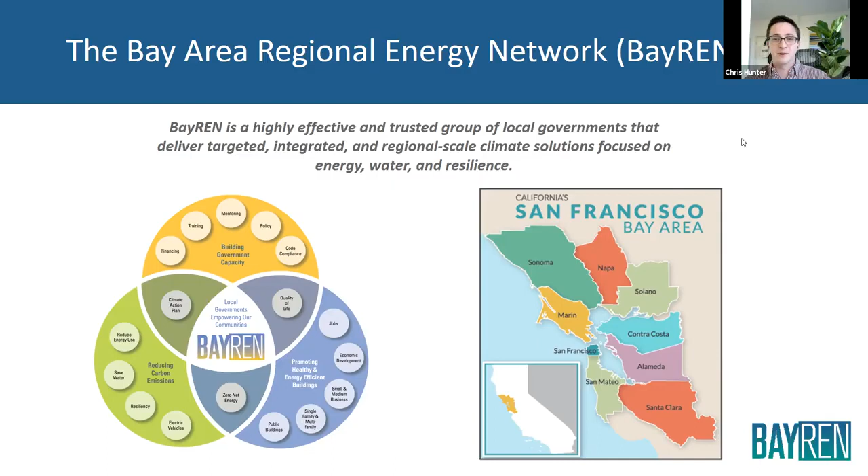So we have a pretty packed agenda today. We'll be covering first some context into what's happening in the energy sector, what are some of the big changes that set the context for why we're even talking about electrification. Then we'll hear from Noah with East Bay Community Energy about your new electricity provider and how you can upgrade to 100% renewable electricity. Then we'll walk through what does an electric home look like, what are the key appliances, what are the key considerations to make. Then we will hear from one of our contractors, Larry Waters, and a homeowner in Berkeley who did a full home electrification. Finally, I'll cover quickly how to get started, what rebates we offer, and hopefully we'll have some time for Q&A.

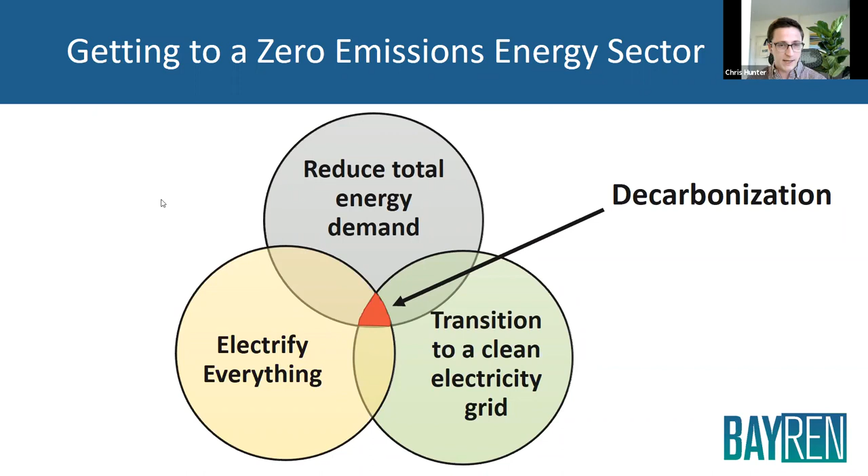I just want to run through a little bit of some of the other pieces, some of the groundwork here. As I'm sure a lot of you know, California has some of the most ambitious climate goals in the world. We have a goal of having our electricity production at 50% renewables by 2025 and 100% zero carbon by 2045.

And we've made really great progress toward that. I actually think we are well ahead of track on that 2025 goal. In the entire US in 2019, for the very first time, renewables surpassed coal in terms of total consumption across the country. You can also see that the cost of solar and wind has really plummeted, to the point where in most cases solar and wind are the cheapest form of electricity you can build.

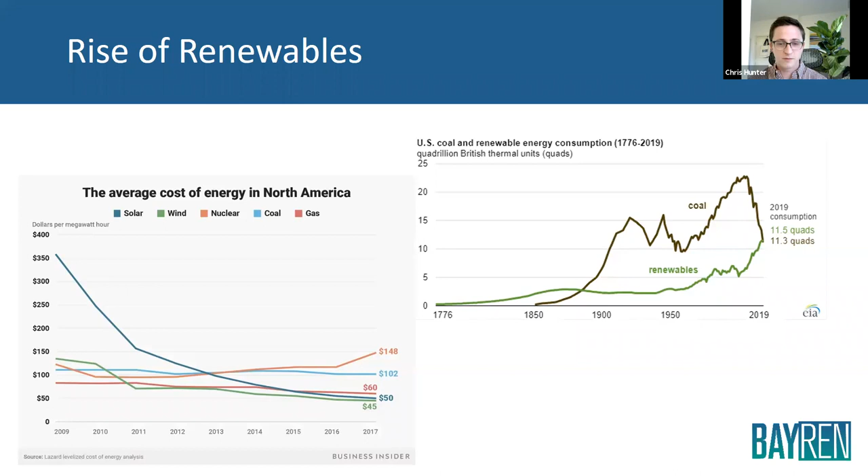So we're really at a turning point here where the grid is getting cleaner. There's been a lot of gains in technologies and in what clean appliances are available. So we're really at an inflection point for moving to an all-electric, decarbonized economy.

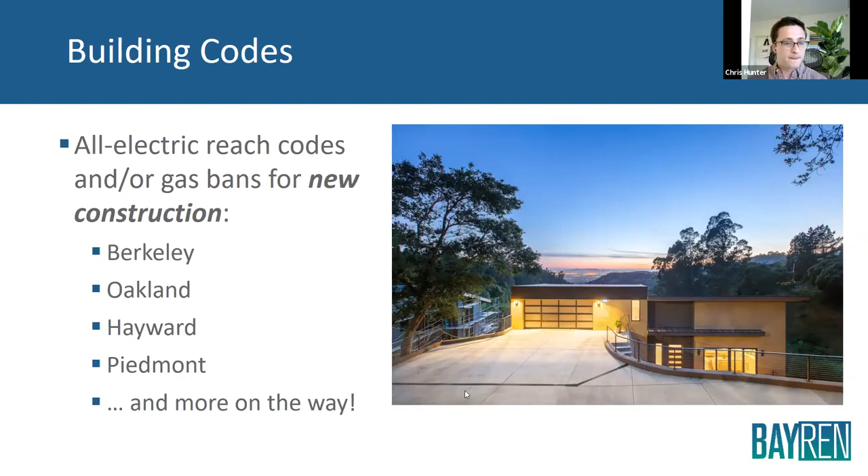You can see that also on the local level, a number of cities in Alameda County have passed all-electric reach codes and gas bans. So for new construction, no one's going to come in and shut off your gas right away, but for new construction they're mandating that those new buildings going up must be all electric. Again, this isn't happening for existing construction quite yet, but cities are starting to think about ways to start encouraging existing buildings to go all electric as well. That's just kind of the direction things are heading in overall.

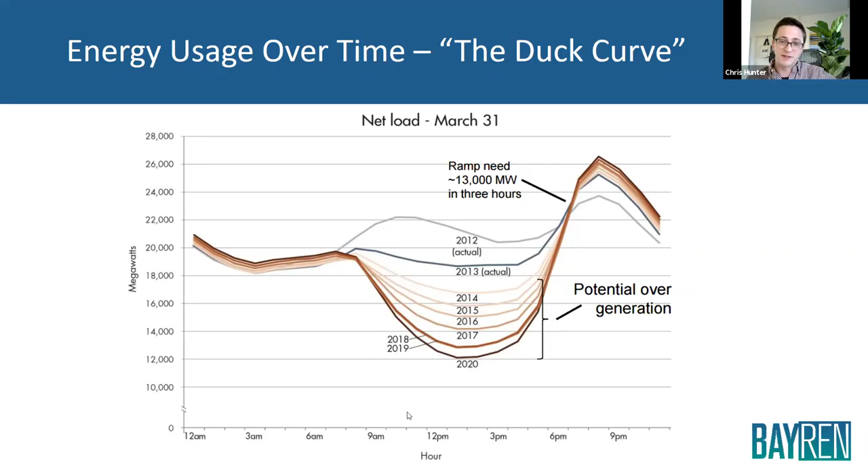There's a lot of programs right now trying to incentivize demand response—doing more of your heavy electricity activities during the middle of the day when the grid is at its cleanest. And finally, as we've seen the last couple of years, there's really a need for resilience. It's not enough to simply reduce our level of emissions, but we need to do it in a way that's building resilience, making sure we can withstand wildfires, extreme heat, and earthquakes.

We've seen, the last couple of years, public safety power shutoff events where PG&E will preemptively shut off power in order to prevent wildfires. We've all experienced the poor air quality for a couple of weeks every fall now due to heavy wildfires. A lot more people are starting to think about installing air conditioning and cooling capacity due to more and more extreme heat days. And of course, there's always the threat in California of a major earthquake.

A lot of people are afraid that if they switch to electricity, they'll be more prone to blackouts and power outages. That's not necessarily the case. There's actually been models and studies done that have shown if a major earthquake were to hit the Bay Area, electricity would probably come back within a couple of days, at most a week, whereas gas could potentially be out for several weeks, up to several months.

So really we want to start thinking about how can we build homes that are resilient, and communities that are resilient, and can keep going despite these disasters.

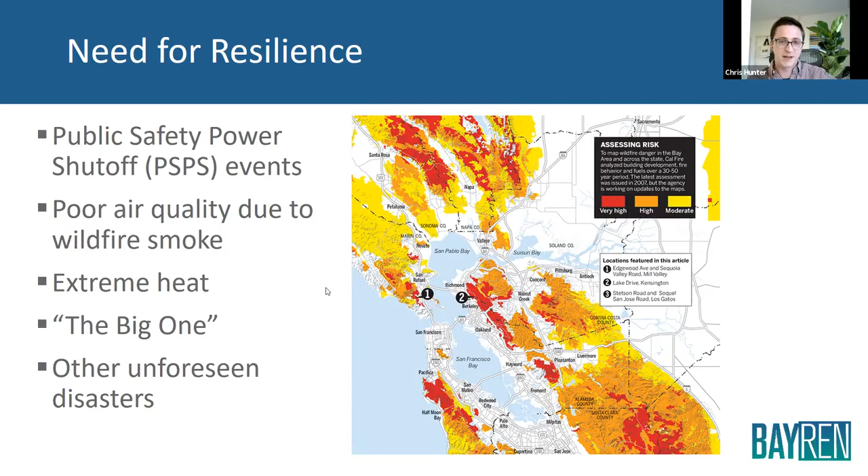But what does this mean? In the short term, taking all this into account, PG&E is going to transition everyone in Alameda County to time of use rates within the next couple of months—I think June is the date. What that means is they'll actually charge more for power during those peak hours of 6 to 9 p.m. when the grid is dirtiest, and electricity will be cheaper during the middle of the day. So that will be happening pretty soon.

I'm sure you've gotten some letters from PG&E explaining that process. A little bit longer term, we expect that as more and more people get off gas, the price of that gas is actually going to go up, because most of the cost is from infrastructure—maintaining the pipes and things like that. It's a fixed cost. So as people get off gas, it's going to be the same amount of costs paid for by fewer and fewer people. So I want to start thinking too about, even though electricity is a little bit more expensive right now, that might not always be the case.

And then finally, we're just going to see a lot more demand for solar panels and battery storage. Noah will talk a little bit about that and what EBCE is doing to address that. We'll also see probably a much bigger focus on indoor air quality, and I'll address how electrification can help during those heavy smoke days of keeping the air inside your house clean as well.

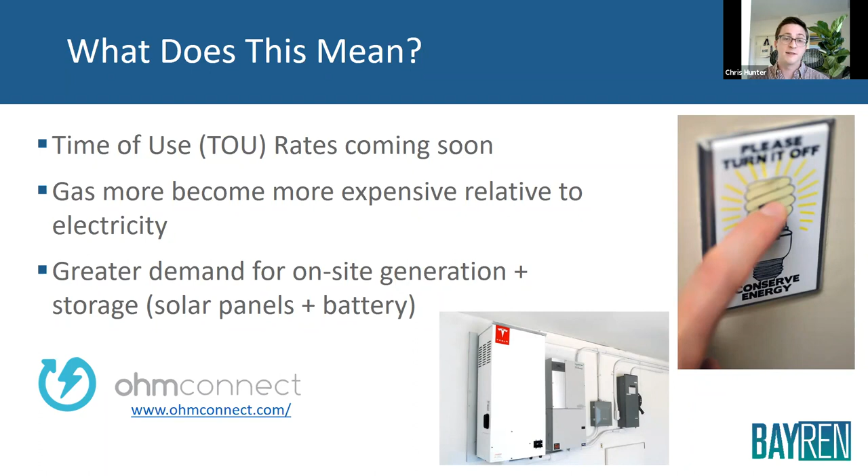So with that, Noah, why don't you take it away?

Hello everyone. I'm just going to give a brief overview of who East Bay Community Energy is, what we do, and what we offer. East Bay Community Energy is essentially a not-for-profit energy provider for all of Alameda County, minus the city of Alameda, and also the city of Tracy in San Joaquin County. Essentially what we do is, because we are the electricity provider, we have revenue from that, and we reinvest earnings through the sale of energy back into the community through local green energy, local jobs, local energy development, and local programs as well. You can jump to the next slide.

Essentially how it works is EBCE handles the purchasing—essentially the procurement and development of new clean power plants for EBCE customers—and sells that directly to customers. PG&E, as always, handles the delivery of that, and then you get all the benefits of having cleaner, lower priced or cost comparable electricity.

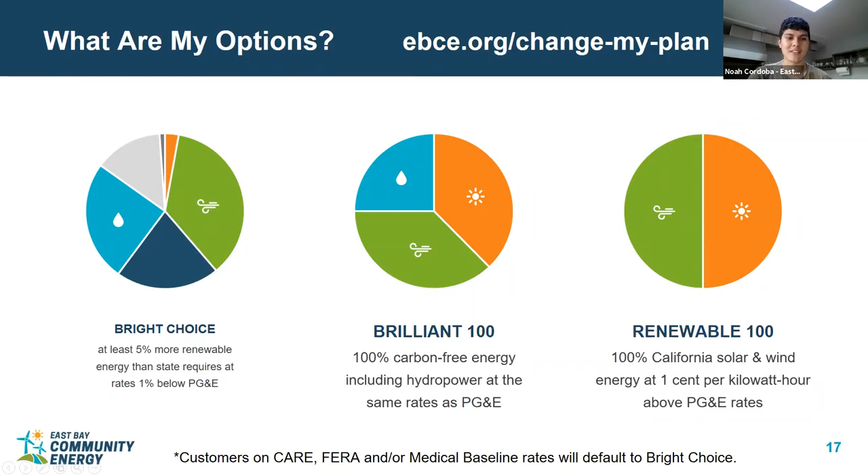One thing I'll note is that if you're not sure whether you're an EBCE customer, you can look at your PG&E bill, because all billing happens directly through PG&E. You'll see PG&E electricity delivery charges, and a line item for East Bay Community Energy delivery charges. That's important for understanding what product you're receiving from EBCE, because when your community decided to become part of East Bay Community Energy, if you stayed with us, you were defaulted onto one of our products. If you're not sure, check your bill, and if you're not on Renewable 100, that's a great opportunity to opt up if you're interested.

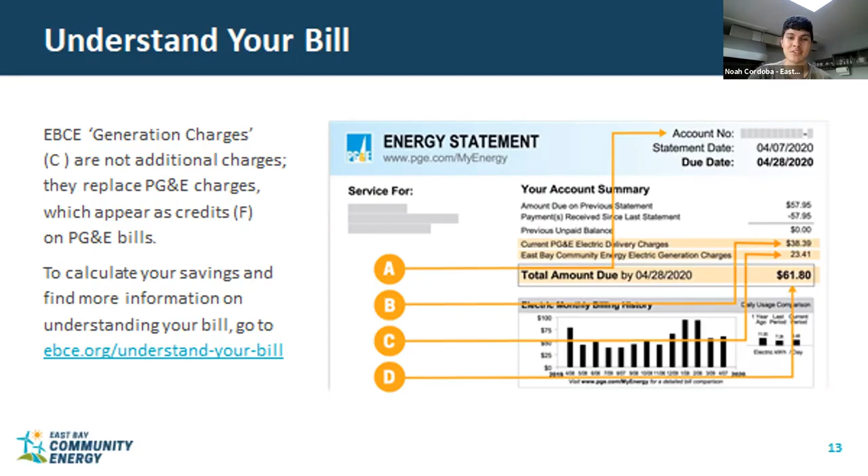I want to plug one of our programs because it's relevant to information you'll receive today about home electrification, specifically generation at the house level. That's our Resilient Home Plus program. This program is designed to help residents access and install residential solar and battery backups on their homes. You're able to visit ebce.org/resilienthome to get more information. We work with a vetted solar installer to access preferred pricing for our customers.

We also have a route for customers to receive a $1,250 incentive to share power with EBCE when there is high demand during that 4 to 9 period. When solar comes offline but you have battery storage, you can achieve a lot of cost savings for yourself, and EBCE will also incentivize you if you're up for that.

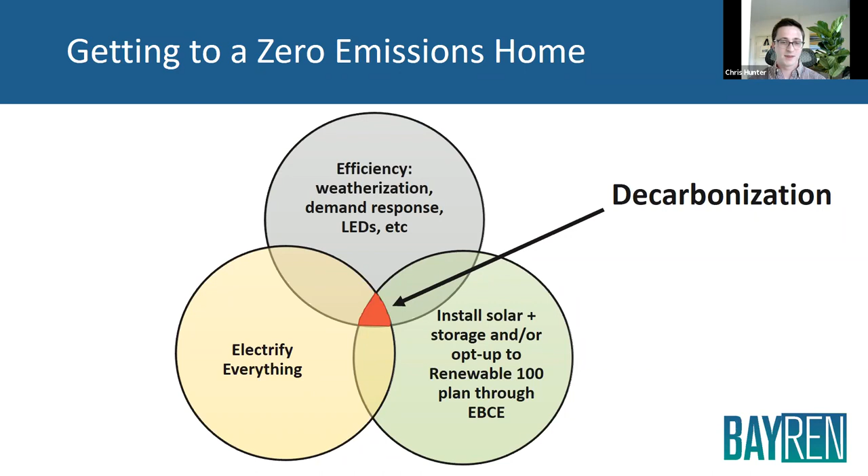And finally, that third step, once all your electricity is clean, would be to shift away from gas furnaces and water heaters into electric appliances.

So mostly we talked about the climate impacts. I know that might not be the most motivating thing to everyone—it's pretty far out there, maybe not everyone cares. But we want to stress that there's a lot of non-climate benefits to this as well, beyond just reducing your emissions, and that's actually probably the bigger draw here.

The biggest one that we always stress is health. There's a lot of really dangerous byproducts from the combustion of natural gas, particularly in your kitchen where you're standing right above it and breathing it in. You can get carbon monoxide, and nitrogen dioxide is a really common one that can cause asthma. Studies have found that children who grew up in homes with gas stoves are 24 to 42% more likely to develop asthma. So if you have kids in your home and you're thinking about making that switch, a stove is probably the most important one to do first in terms of health, even if it might not have the biggest impact in terms of lowering your emissions.

And then there's a number of other benefits. The biggest one in safety is just that there's no risk of a leak or an explosion. I grew up in San Mateo County, and I remember clearly the San Bruno explosion when I was a kid. That was really scary, and it could happen again, so we want to reduce that risk as much as possible.

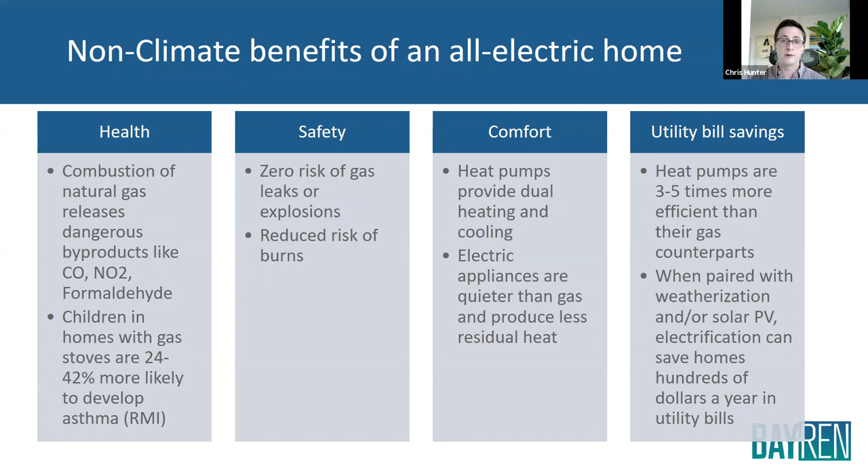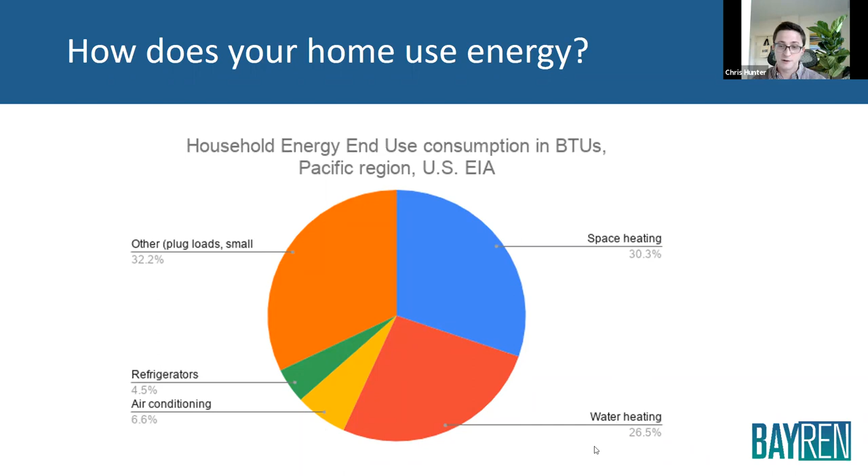I already talked about this, but I really can't stress enough how important efficiency is before you electrify, for a couple of reasons. One, it's easier to do at any time—if your water heater and furnace are under 10 years old, it might not be time to replace those yet. In the meantime, you can make sure your attic and walls are well insulated, do air sealing, and make sure your ducts are sealed and insulated. These will save you a lot of energy and lower your utility bill quite a bit while you're waiting to make bigger changes to your appliances.

And BayREN does offer rebates for all of these. We'll go over that at the end of the presentation.

You can get up to $1,000 each for attic insulation and wall insulation, and then smaller rebates for air sealing and duct repair and replacement. So it's really important to do these first.

The other reason is you want to make sure when you replace your furnace that you're sizing it correctly. If you just replace your furnace with a heat pump without doing these efficiency measures first, odds are you'll get a system that's way too big, which means it'll cost too much upfront, use more energy than it needs to, and not save you as much money. It also might not have much impact on comfort if your home is really drafty and losing a lot of that warm air your heat pump is producing.

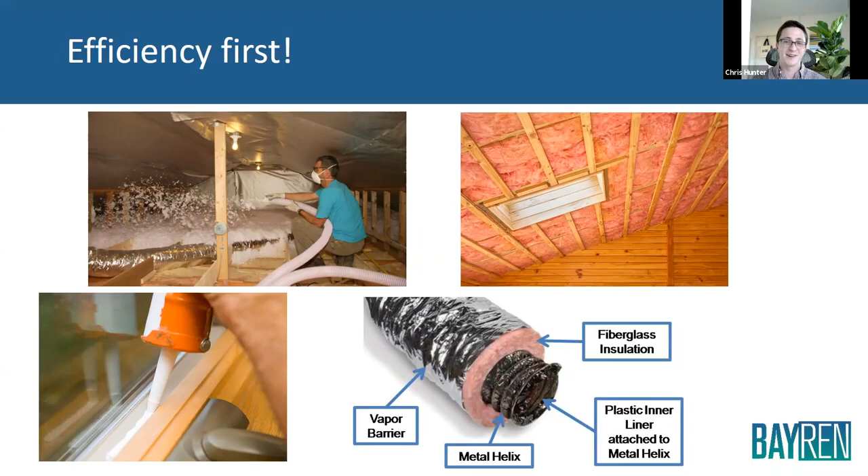So it's really important to think about efficiency before electrification, or together, but we always want to stress that. Now into the actual fun stuff.

If you look into anything related to electrification, you're going to see the word heat pump quite a bit. It's going to pop up all the time. A heat pump isn't one specific appliance, it's rather a technology used in a number of really highly efficient appliances. Normally if we were in person, I'd ask you to raise your hands if you already have a heat pump in your house, but you should all have your hands raised, because if you have a refrigerator, you have a heat pump.

Your refrigerator works like this: it's a box with a fan that blows air out of the box, and has lines of refrigerant that absorb the heat from that air and cool the refrigerator down. A heat pump water heater works very similarly. You have a fan at the top that blows air in, compresses that, then it has a tube filled with refrigerant fluid that absorbs all the heat from the air and puts it into the water, and cool air comes out the other side.

There's a couple of benefits to this. The main one is that they're 300 to 400% efficient, which sounds impossible. The reason is that a gas or electric resistance water heater burns gas or creates friction to generate heat and put that into the water. A heat pump doesn't generate heat, it simply moves heat from one place to another. So for every 1 unit of electricity the heat pump water heater uses, it can put 3 to 4 units of heat into the water, compared to gas, which for every 1 unit it burns can only put about 0.8 to 0.9 units into the water. So they're much more efficient and can save you money that way.

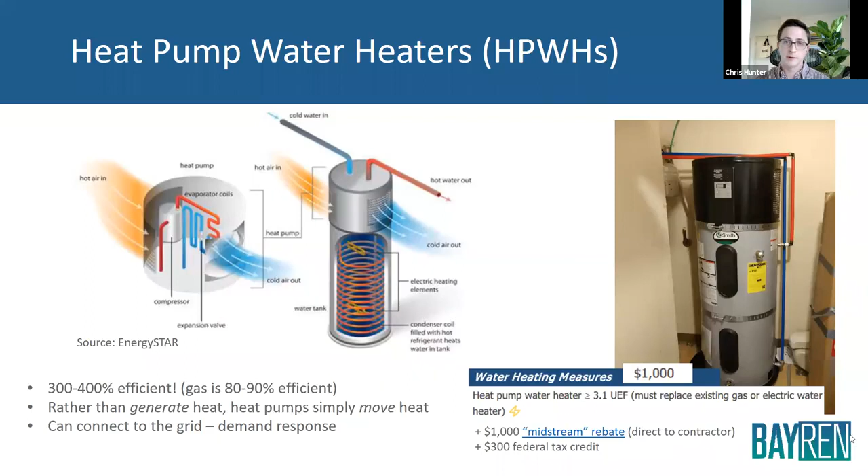The same heat pump technology also works for heating and cooling. The only difference is the condenser unit goes outside, and looks a little bit like an air conditioning unit. Then there's a separate air handler inside, connected with refrigerant lines. Again, in addition to being super efficient, 300 to 400% efficient, these also provide the benefit of being able to switch directions, so you can provide heating or cooling. If you're someone who doesn't currently have AC and you're considering adding it, this could be a really great solution to avoid the cost of upgrading two appliances at once.

And they also have some flexibility. So if you have a house with a current central furnace with a duct system, you can just replace the furnace with the air handler right where it is, and then add that heat pump outside, and you're good to go. It'll work just like your furnace now, except it'll also provide cooling.

The other option is you'd have that heat pump outside and then multiple lines of refrigerant running to different parts of the house, and each room could have its own air handler. So if mom and dad like the room a little bit cooler, they can set it cooler, and the kids can set the room warmer, and you're still being really efficient and not doubling down on how much energy you're using.

We do have $1,000 in rebates available for these as well. There are some limitations with the central systems, so make sure to look into that or ask your contractor before going through with that and make sure that you are eligible. Again, it's a $1,000 rebate plus a $300 federal tax credit.

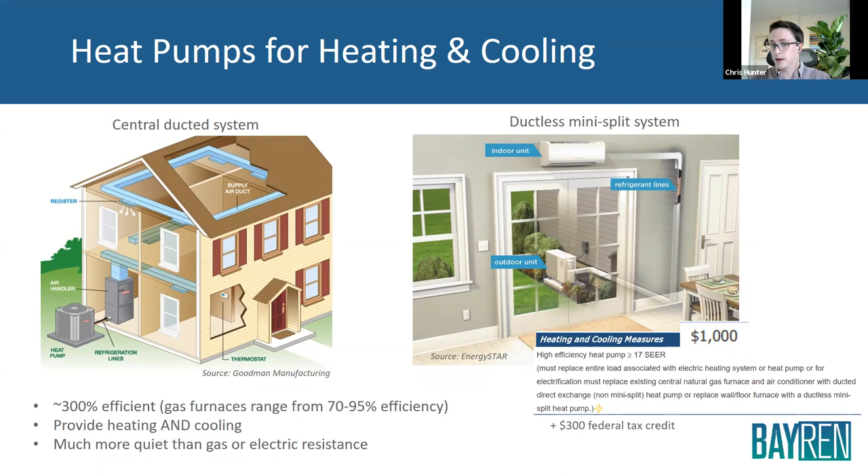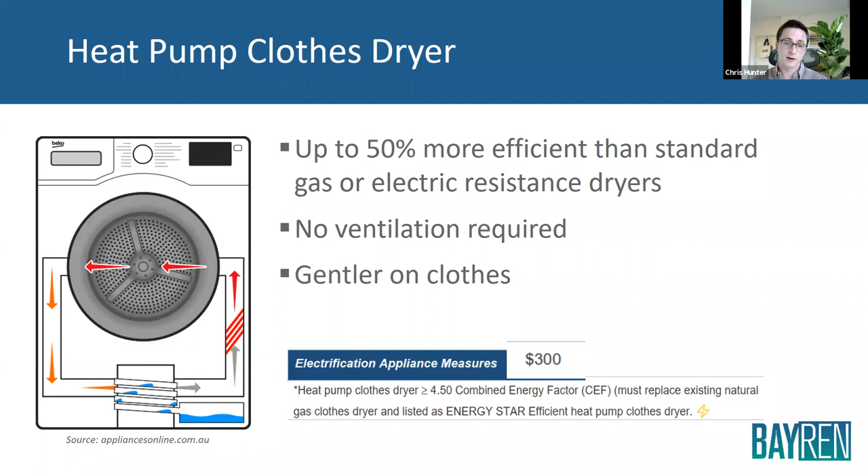The other big appliance that heat pumps are used in is clothes dryers. I'm not going to spend too much time on this, but again, they're highly efficient, 50% more efficient than a standard dryer. The other big benefit is they don't need ventilation, so they're really easy to install and pretty low maintenance, and they're also really gentle on clothes. A lot of these are a little bit more upfront than a normal gas dryer, but we do offer a $300 rebate for these, which brings them mostly in line.

And then this is a big one that always gets a lot of questions, is induction cooktops. A lot of people, their first reaction when they hear about electric cooking is these old coil systems that get really hot. I actually have one of those in my apartment. I hate it, they're terrible. But induction is not that. That's the important thing to remember.

Induction works not like a heat pump, but using electromagnetics. Rather than creating heat like a gas stove, they use an electric magnet to activate the electrons directly in the pan, and the pan itself turns into the vehicle of heat. The pan is what's getting hot, not the stove itself. So again, they're very efficient and can save you money in the long run.

I think the biggest factor here is indoor air quality. They do not release any byproducts, so you're not breathing in any of that nitrogen dioxide that can cause asthma. They're much better for indoor air quality, and they're a lot safer—it's hard to burn yourself quite as easily. And people just like cooking on them.

We actually have an event coming up tomorrow evening, I'll send out the info, where we're going to have a professional chef who cooks on induction and talks all about why she loves induction so much. They're really fast and really powerful to cook on, so a lot of people really enjoy them. It's a little bit of a learning curve, but it's not too bad.

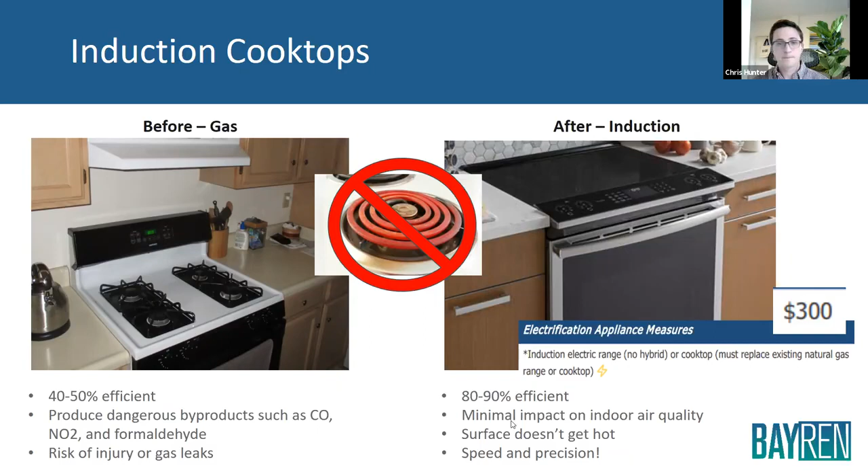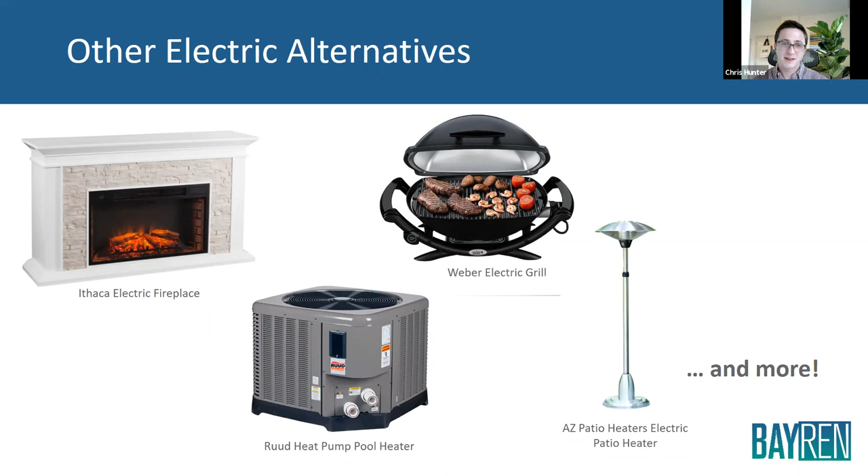I'm not going to talk too much about these since we don't offer any rebates or resources for them, but just know that almost any appliance or system in your home that burns either gas or propane, there is an electric alternative for that. There are models out there on the market now for electric fireplaces, heat pump pool heaters, electric grills, electric patio heaters—almost anything you can think of. There's an electric alternative that probably works just as well as the fossil fuel powered one you might be used to. So if you are doing a remodel or redoing your patio, something to think about and look into the options.

And then the last thing I want to touch on here, not super fun, is electric panel upgrades. If you're switching all of your appliances from gas to electric, that's going to add a lot of load onto your electric panel that has to process. You really want to make sure you have the capacity to accommodate all those new electric appliances. Most homes in the region have anywhere from 100 to 200 amp panels.

Usually newer houses and larger houses will have the 200 amp or larger panels. A lot of the older, smaller homes in places like Berkeley and Oakland might only have 100 amp panels. If you have 200 amps, you should be okay. I would still consult your contractor, do some research, but in most cases, 200 amps is enough to accommodate a fully electric home. 100 to 150 amps, it's a little bit trickier.

It is possible. This table on the right is an example of a 2,000 square foot home with a 100 amp panel that was able to go all electric without doing a panel upgrade. But they had to get a little bit creative.

So before you call the contractor, maybe take a look at your panel, see what size it is, and if it's 100 or 150, bring that up, get their advice, and make sure to do some research before you install a heat pump water heater that could put you over that limit. I'm hoping the contractors on the line can answer any more specific questions about that.

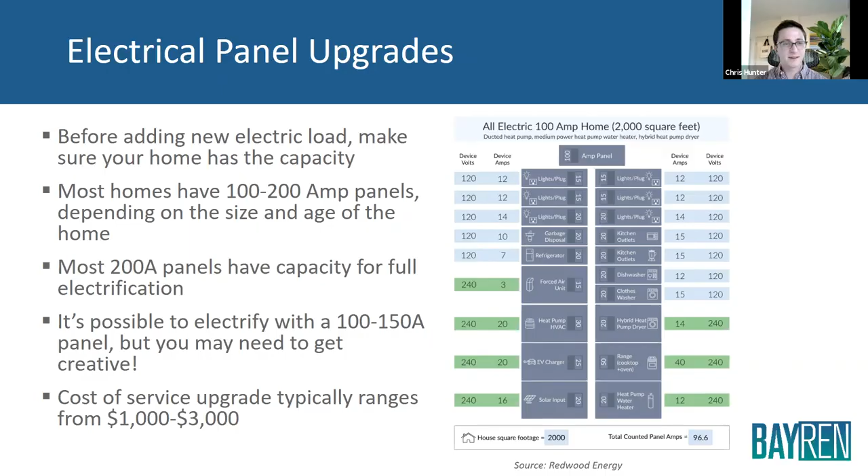So with that, Larry, if you are able to turn on your video. Larry is with Electrify My Home. They're a BayREN participating contractor. He does some really great work around home electrification. He's going to talk about a case study in Berkeley, and we actually have Rebecca, the homeowner, who's also on the line and can answer some questions. So take it away. She is in El Cerrito, and she works for the City of Berkeley.

My name is Larry Waters, and I am the owner and founder of Electrify My Home, the first of its kind, only electrification business. If you have questions about gas, don't call me.

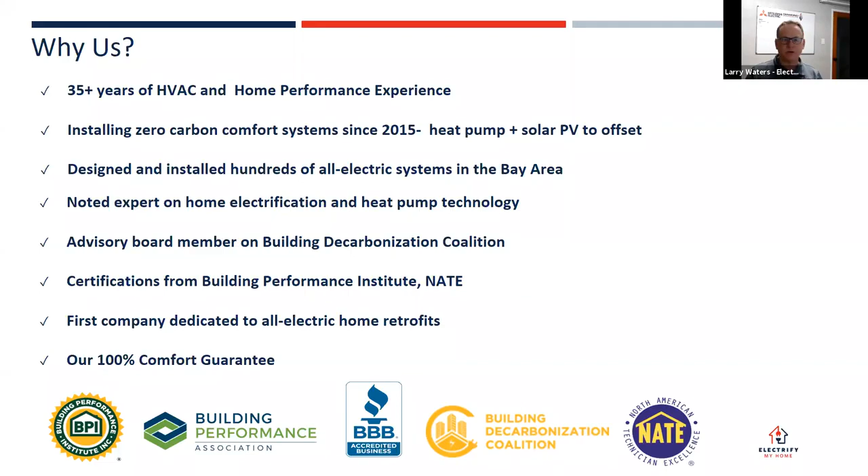We have a unique virtual process to start everyone off, and we have a program and a process designed to understand your goals and needs. First, you reach out to my company, email, phone call, whatever it is. We're going to send you a great welcome email that has a link to our data collection page on our website. It asks you about 40 questions about your home that are age specific, and it sends me a really nice report. At the point when I get the report, I'll do a little back history on your home, learn a little bit about it, and then we'll have a virtual assessment.

So I will get you on your device. We'll walk around your house together. We don't burn any carbon coming out to your house, and we don't waste any of your time. We don't indulge in bringing our stuff into your home, so you don't got to worry. It's super safe. And we can give you budget number ranges up front based on your home.

At that point, if we agree on costs, then we will make an appointment to come out and measure and verify the quote. We'll approve it and schedule it, and we'll get you started on your electrification process.

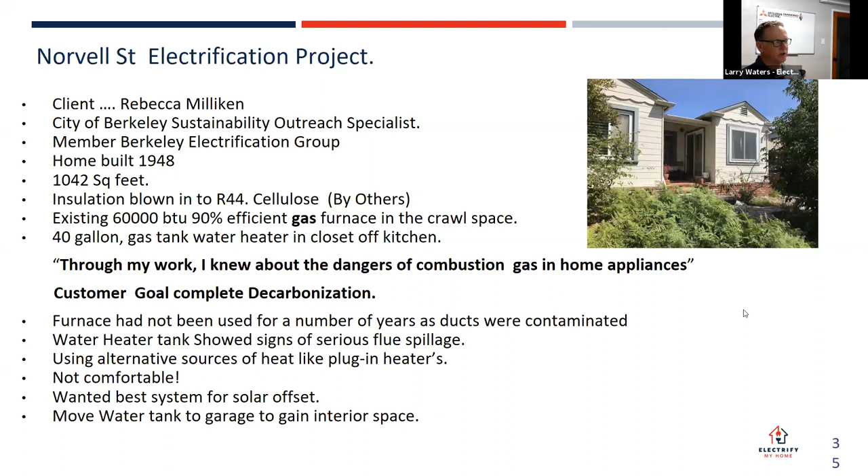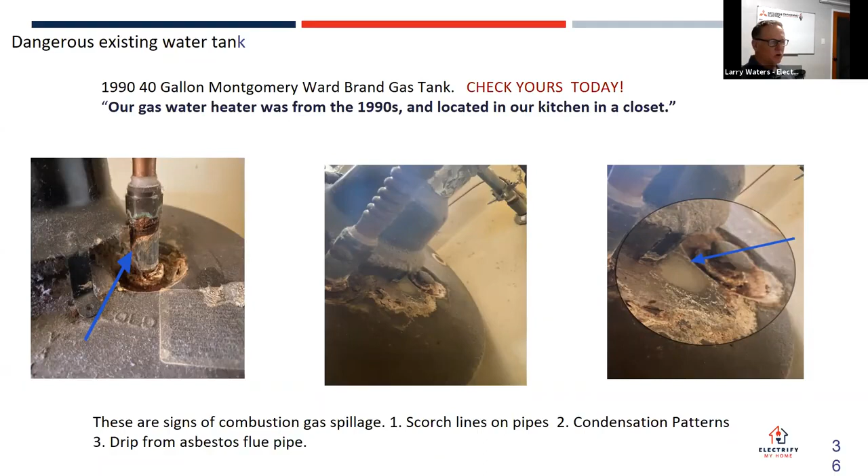A lot of them are from combustion leakage or spillage, and the accumulated moisture that comes in with that spillage over time. You can actually see the picture on the left there. There's actual scorching on the nipple right there where the pipe is connected. You can see it has gassed off for quite a while.

We put a heat pump tank in the garage. We moved it away from the inside of the house so they could shore up a little extra space in the house. And kind of one of the side benefits is her garage is going to be nice and cool this summer, so she can go out there and do laundry in a nice cool garage.

These systems have zero carbon output at point of use. They have multiple settings for performance and energy savings. I spoke with her today, and she has really learned a lot about how to set this system for the most efficient way. And we install a mixing valve on each one of these.

We get a lot of questions about what happens when the power fails. So we set these tanks to run at 140 or 150, so the water is really, really hot. Then we adjust down the water temperature to 120 at the mixing valve. So we have a lot of reserve capacity.

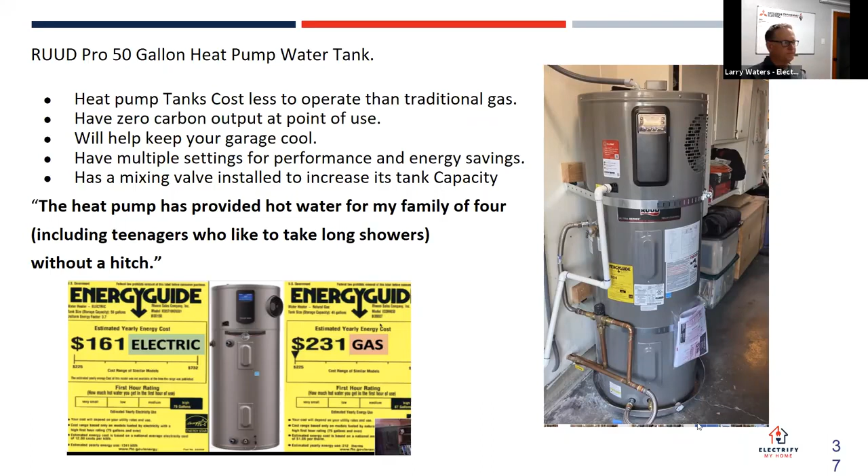A good electrification project always is going to start with a real load calculation. If somebody doesn't come out and measure your home, measure your windows, look at what you have in your home, and actually apply it to a computer program, they're not doing a load calculation. A lot of companies will come out and put some stuff down on a piece of paper and say, good, your system matches page 13. This is not how we do this when we're in home performance and doing good electrification. We have to know what size system fits the house.

In her particular situation, we have a 648 CFM system needed in that house. It was really coming in around 13,000 BTUs, and we ended up putting an 18,000 BTU heat pump in that house. It is a Fujitsu inverter system, and we'll show a little bit more about that. Her house is also featured in the 2021 East Bay Green Home Tour.

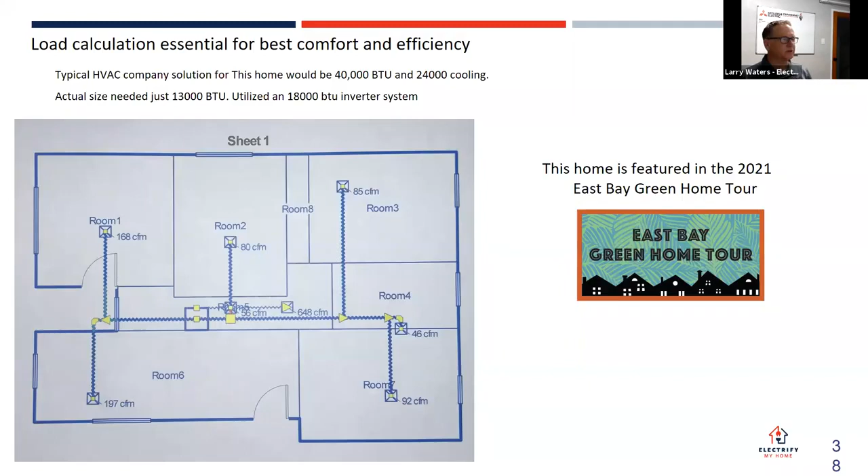Not only is this furnace too big for the house, it was almost too big for the hole for us to get it out. I had to get 2 guys on one side pulling and another guy on the other side kicking with his feet just to get the thing out of the hole on the side of the house. And that's when we say your furnace is too big for your house, this is not what we mean.

What we mean is the BTU range is often too big for your house. Her furnace died about 18 years ago. They installed a new furnace. It was oversized and really loud. They trusted a contractor to come put this system in, and unfortunately the contractor didn't do really great sizing at the time. We were able to reduce the capacity by 2/3.

They also had a 14-inch return air on this, and maybe in the audience here we don't understand the implication of a return air, but the return air duct is where the air goes into the system. The larger that return air is, the quieter the system is. The smaller the return air is, the more noise it makes because it has to draw through with more velocity.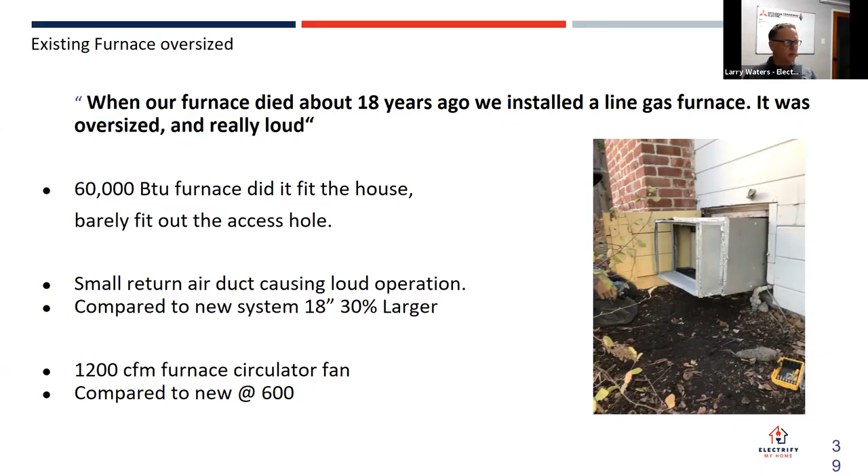This system had a 14-inch return air on it with 1,200 CFM of furnace circulator fan, so that means it's really loud and it's really inefficient. So we took out that 14 and we put in an 18-inch return air, and we reduced her system by 2/3 with 600 CFM. She will tell you in a moment that she cannot hear her system operate.

This is my guys under here, and a little bit about our thinking on these systems. We reduced her capacity by more than 2/3. That saved her money. We did the load calculation. That increased her comfort. We used a ducted mini split system located in the crawl space.

It's 20.2 SEER, so it's super efficient. It's even more efficient than that when it's running in its lower modes. New properly sized duct system based on the load calculation, insulated to R8. We were able to reuse most of her existing locations for the ducts in the floor because the house is smaller. And we increased that return air, and it made it super, super quiet.

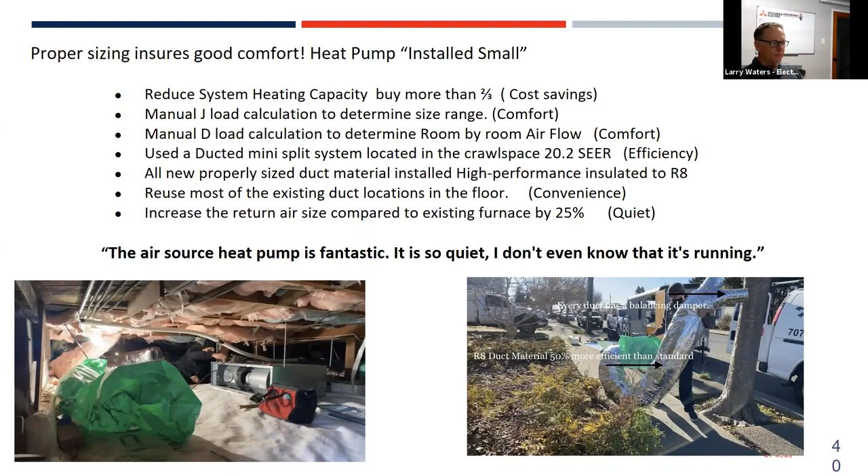Properly planned solutions create a pathway to good electrification. I'm trying to get this term good electrification into the vernacular because that's what you need to ask your contractor for. Just having a heat pump installed in your house that's going to take 6 or more, four to 6 breaker spaces in your panel. We were just talking about a second ago, Chris was mentioning you have to be creative with the electrical panels in order to make all this stuff fit.

The first way to do that is not to have some big clunky unitary heat pump installed that takes, if you have to run additional power to where your furnace was to run the system, that's not good electrification. We want to make as little impact on your panel as possible. So all of my systems, the most they will ever take is 2 breaker spaces, 1 double pole breaker. This particular system only needed 1 20-amp breaker to run the entire system for the house.

This unit uses 50% less energy than a traditional heat pump, and the one-to-one application keeps it very simple. It's not a unit where there's multiple systems mounted on each wall in the house. Those get very complicated, very costly, and if there's ever a leak in them, they get very, very hard to figure out what's going on with them. This is a simple process applied like a traditional central heating and cooling system using an inverter mini split system.

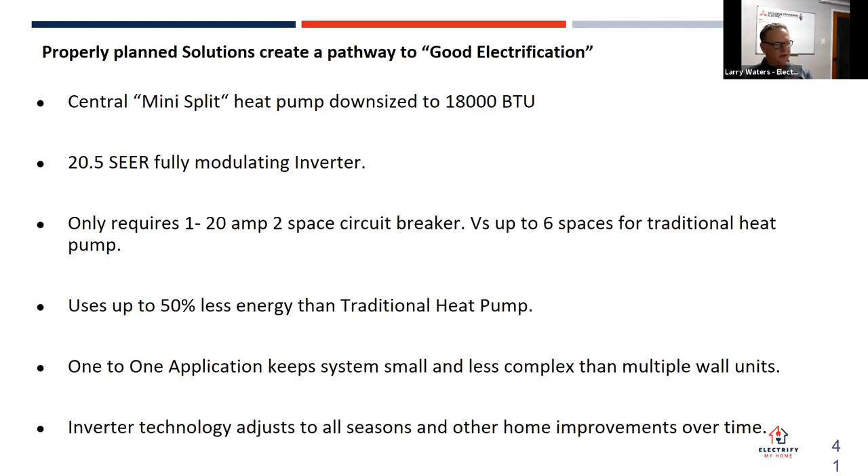This is what they look like when they're all done. These are the indicators. You got a really big return air for quiet, a really good filter for those smoke days so you can shut those windows and turn that unit on and stay nice and comfy. A great air handling unit sized properly, new ductwork, and all of that equals really comfortable homeowners.

This should be done by a specialist, people. You wouldn't take your Tesla to the diesel mechanic. You wouldn't take your Porsche to the Chevy dealer. You need a specialist for this. We are a specialist that specializes in these types of small system installs.

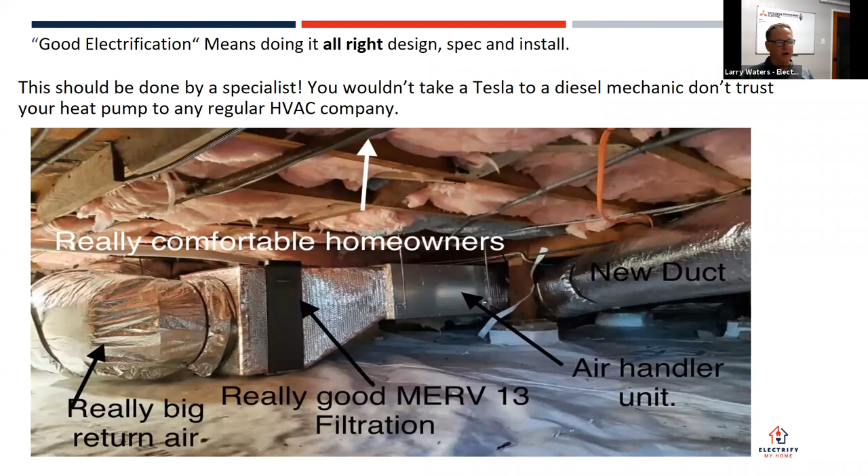For the techies out there and the nerd energy geek people, I'm with you right there. I'm one of you, I am the biggest nerd you're ever going to meet. These systems have some really impressive stats.

This system adjusts its output. It'll go real slow when it needs to, and real fast when it needs to. It gears all the way down to 5,400 BTUs at the lowest, which means it'll give you a trickle of heating and cooling when you need it, and it'll give you reserve capacity.

This is an 18,000 BTU nominal system that'll actually give you 25,600 BTUs when you need them. That means that old fight over the thermostat back in the day where the wife comes in and turns the unit down to 45 degrees thinking it's going to cool faster—with this one, you can turn it down a couple of degrees and it'll cool faster.

It's pretty amazing stuff. If you look to the right of the screen, you can see how much energy these use. Anybody that owns a hair dryer is going to realize that when this unit is fully functional in its highest operation mode, on the heating side, it's using 2.19 kilowatts, that's 2,190 watts. A really good hair dryer is using 1,850 watts. So this system is cooling your house for just slightly more energy than a hair dryer.

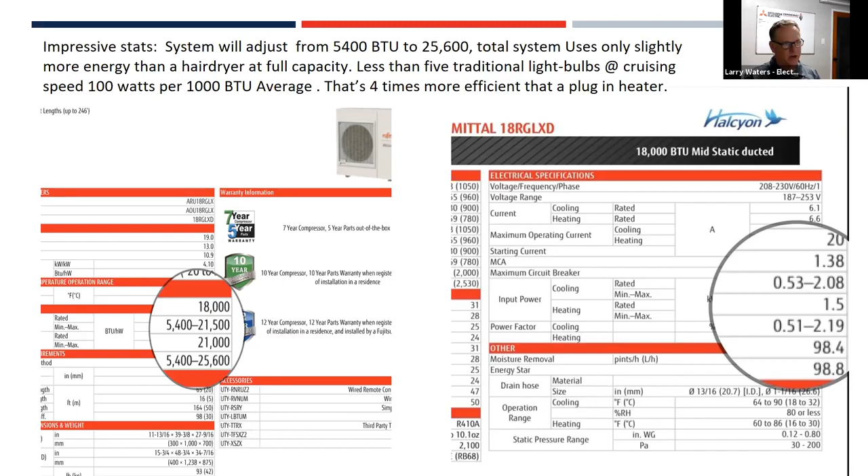And if you look above, it's even less difference, 2.08, 2,000 watts to cool your house. That's just slightly more than one plug-in heater for one room that doesn't do a very good job. I can take care of your entire house instead.

This is the beautiful unit that we put out there, the Fujitsu—we don't have to be brand centric on this one, but these are really good systems. It's very quiet and extremely energy efficient, as we've said, and it's the key to good electrification.

The thing about the inverter technology in this, that thing we just talked about where it goes from 5,400 to 25,600 BTUs, that is inverter technology, it speeds up and slows down. If you're in the middle of doing other improvements in your house, like getting the heat pump now and some windows in a couple of years, this unit will automatically adjust to the improvements you make in your house, and it will become the right size for whatever improvements you do. That's the magic of these systems.

And what's our goal? Our goal is capped gas lines. We love capped gas lines, I live for capped gas lines. This is Rebecca's husband turning the gas off after the last appliance they got rid of. I'll let her tell you about the experience with that. I'm proud of her, and man, we're proud of this.

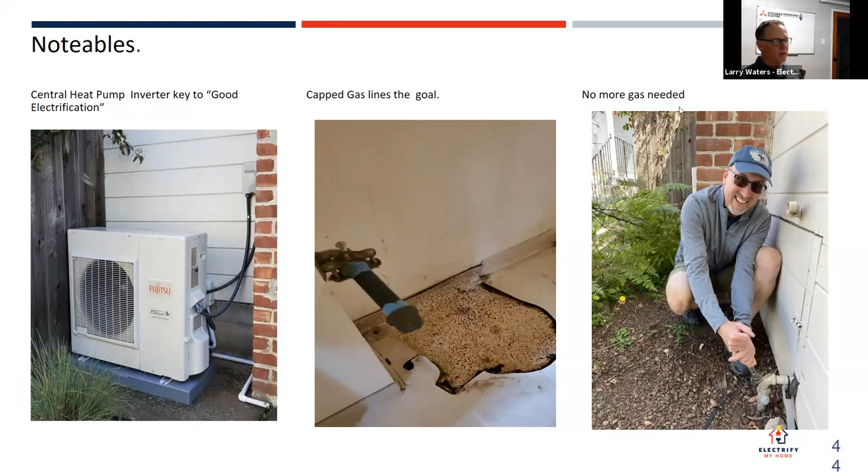They've completely ditched the dirty gas, no furnace operation for several years, and now they've got hot water too. The electric costs for her have dropped and will soon be completely offset with renewable solar. She will have near zero energy costs at this pre-existing home because we planned this process right. She's installing the renewables that will offset it. She doesn't have a gas meter anymore. They now have AC and filtration, and they can shut their windows and be comfortable during the smoke events.

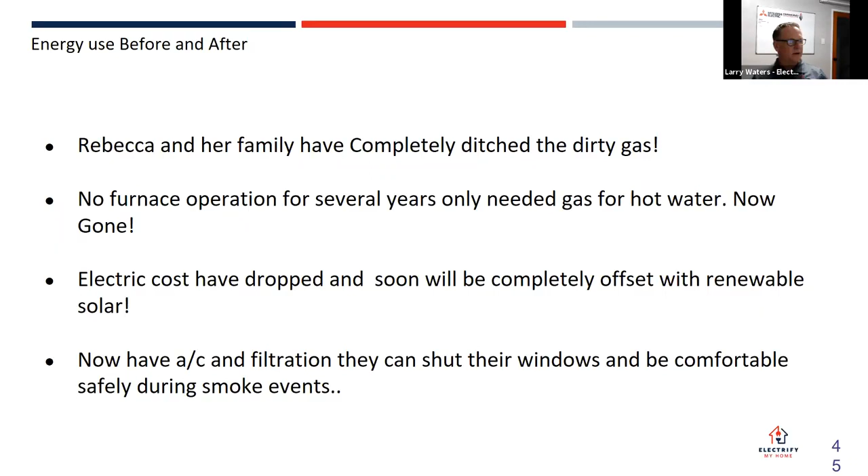Sure. Hey, hi, Larry. How are you? I haven't seen you in so long. I know, good to see you again.

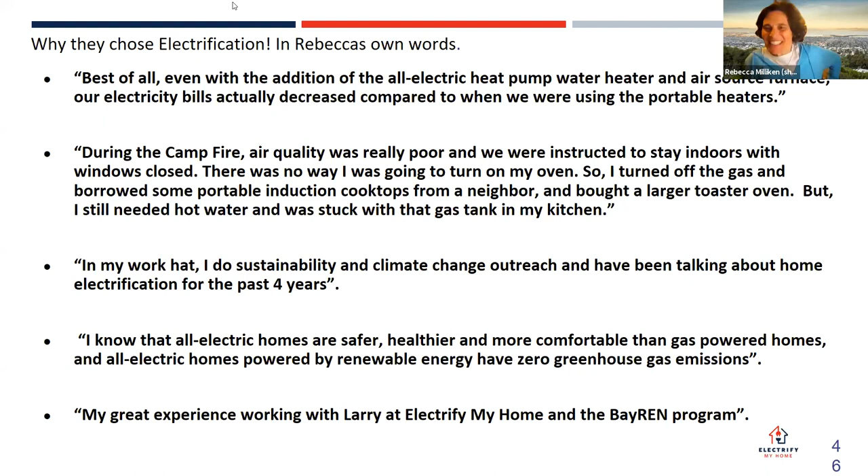Hi, everyone. Some of you in Alameda County may recognize my name, I do work for the city of Berkeley and I do outreach on sustainability, so I've been talking about electrification for years. But I'm here today just as a Bay Area resident, a neighbor who's really passionate about electrification, so I like to say I'm wearing my personal hat, not my work hat tonight. It also lets me say wonderful things about Larry.

That's awesome. So, really exciting, I heard Chris before talking about air quality, and in our house, as Larry said, we didn't know that gas water heater was in our kitchen. It was from the 1990s. We have a really bad exhaust over our stove, it's like one of those microwave exhausts, we don't even know if it actually works, it makes a lot of noise. But once I had done some air testing some years ago, every time my gas water heater went on, we were seeing spikes in pollutants in the house.

But it took us a little while to get to this point. I'm glad we waited because those BayREN rebates became available for us, and it was really exciting. As Larry mentioned, last week PG&E came out for free and they actually capped our gas line at the main.

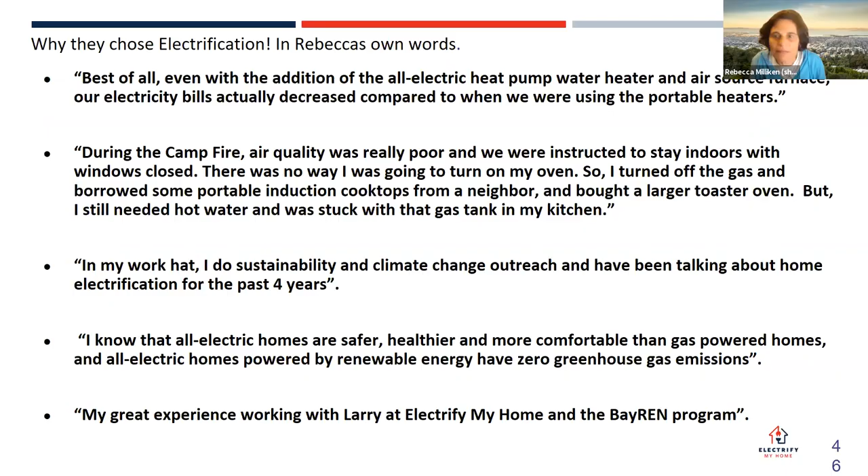I want to give you some other resources that BayREN offers and how you can actually go ahead and get started. One of the first things you can do, if all this sounds really great but it's a little overwhelming and you don't really know where your house is at, is to start with a home energy score. This is the service we offer. An assessor will come out and do a walkthrough of your home, looking at everything from your appliances to your windows, your insulation, and plug it into a calculator. You'll get a score from 1 to 10 ranking how efficient your home is, and it also comes with a set of personalized recommendations. This is a great way to learn more about your home, see what needs to be addressed, and get started.

And there's anywhere from a $200 to a $400 rebate available for that, depending on how much they look at through the assessment.

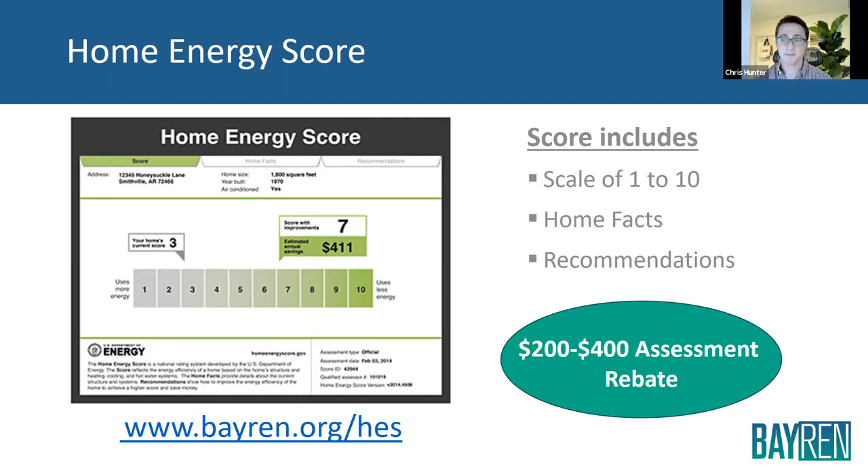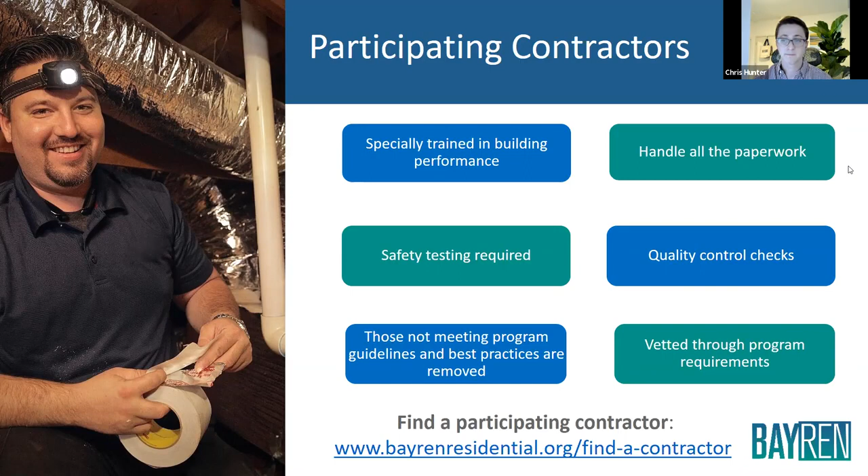So the process to actually get a rebate, really the only thing you have to do is select a contractor and they'll work with you the rest of the way. The home energy advisor and the home energy score are both optional. We recommend them, but feel free to skip those and just go straight to contacting your contractor, getting a quote, deciding on the project, and then the contractor will walk you through the rest. It's a fairly simple process - they just need to install the upgrades, do a quick safety test to make sure there's no gas leaks, and then you get your check in the mail.

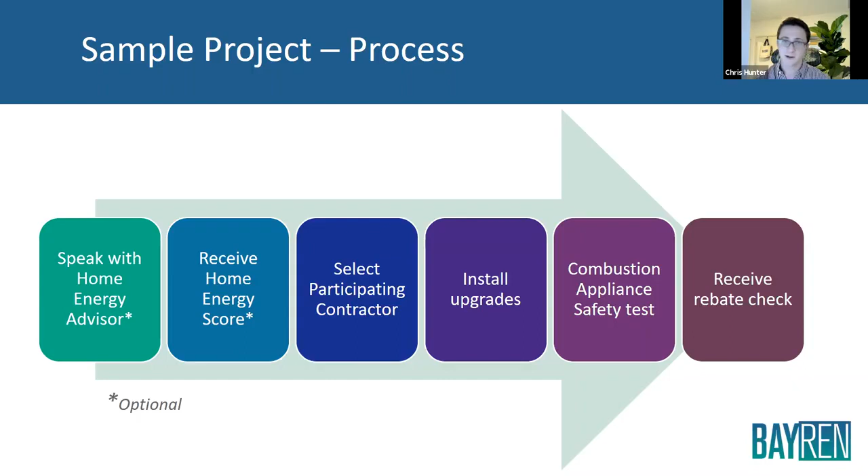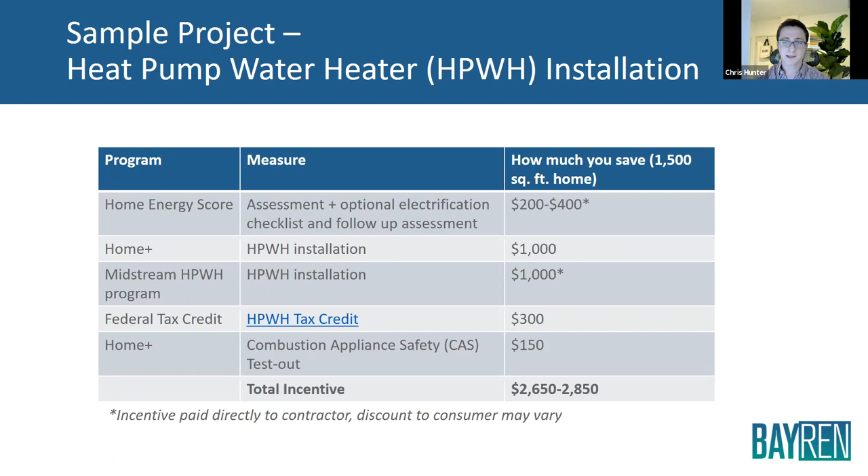So this is what a sample project looks like if all you're doing is a heat pump water heater. You can get $200 to $400 from the home energy score, $1,000 from Home Plus, $1,000 that goes to the contractor for our midstream program, $300 federal tax credit, and then $150 rebate for doing the combustion appliance safety test. That comes out to almost $3,000 for only doing the heat pump water heater. And if you combine that with any weatherization rebates or anything else, you can get up to $5,000.

I'm actually going to skip over these. I will send out a PDF tomorrow along with these slides that has all of this written out, but you can see specifically which rebates we offer.

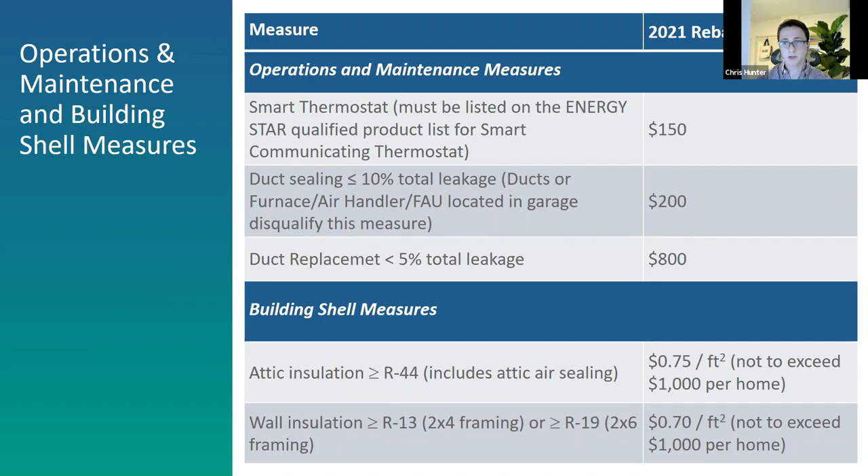I'm going to skip over financing. Just know that there are financing options available. There's some that are specifically income qualified, some that are structured different ways where you can refinance as part of your mortgage, some that are more of a standard loan. If you are interested in that, reach out to one of those home energy advisors and they can go over your options with you.